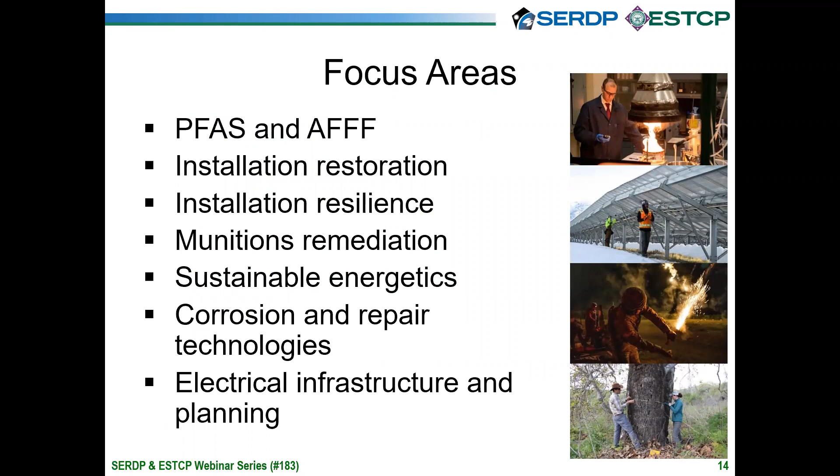We have several main focus areas for research and demonstration at SERDP and ESTCP, as are shown here on this slide.

As mentioned earlier, technology transfer is very important within the SERDP and ESTCP programs. Technology transfer efforts include the development of videos, training workshops, and guidance documents. The webinar series is a substantial component of our technology transfer efforts. Our webinar series highlights research and demonstration efforts from all of our program areas.

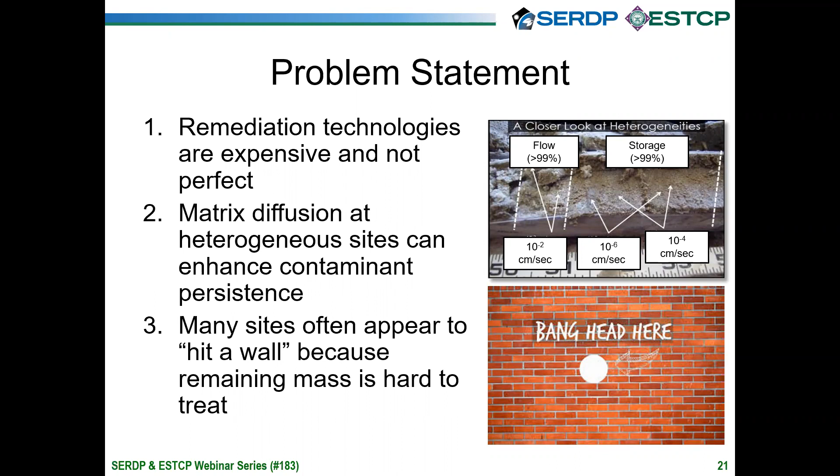So matrix diffusion is one of those processes, particularly at these heterogeneous sites, where that mass gets into these lower permeability zones, and it's just really difficult to target and can increase the amount of time in which that contaminant can stick around at a particular site. So what we're left with then is these sites where we've sort of hit a wall. Everything that we're doing is not necessarily leading to vast improvements. And it's because of the fact that that mass that's remaining is hard to treat in an efficient way. So this leads us to thinking about what to do next at a lot of these sites.

I've got one site I think that I've dealt with for 18 years since the first treatment, and we're sort of in this process now of deciding what to do next, what to transition to. And so in 2013, the NRC came out with this great document where they discussed this in context of these complex contaminated groundwater sites.

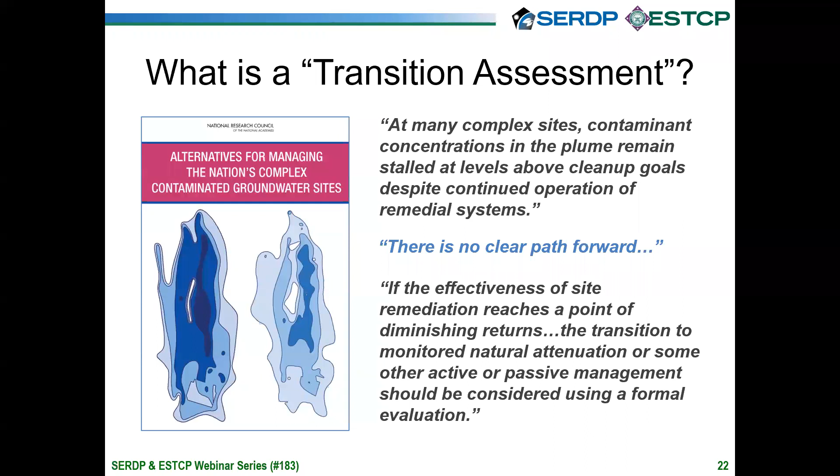And what they said was that at these sites, contaminant concentrations in the plume remain stalled at levels above cleanup goals despite continued operation of remedial systems. They said there's no clear path forward. And then they also point out that the effectiveness of site remediation, when you've got this point of diminishing returns, that's the perfect opportunity to transition to these other active or passive management approaches, things like monitored natural attenuation, and to do that in a more formal way.

So they proposed in this document these 3 key elements. Those are listed here. First is going through the conceptual site model and understanding the complexities at that site and what the implication of those complexities are for achieving cleanup goals. Secondly, do a very quantitative assessment of your concentration trends, be it at an extraction well or various monitoring wells across the site, to understand what's really going on in terms of the performance of what existing remediation systems might be doing, and then identify, if you want to transition, what appropriate approaches might be available for you, things like monitored natural attenuation.

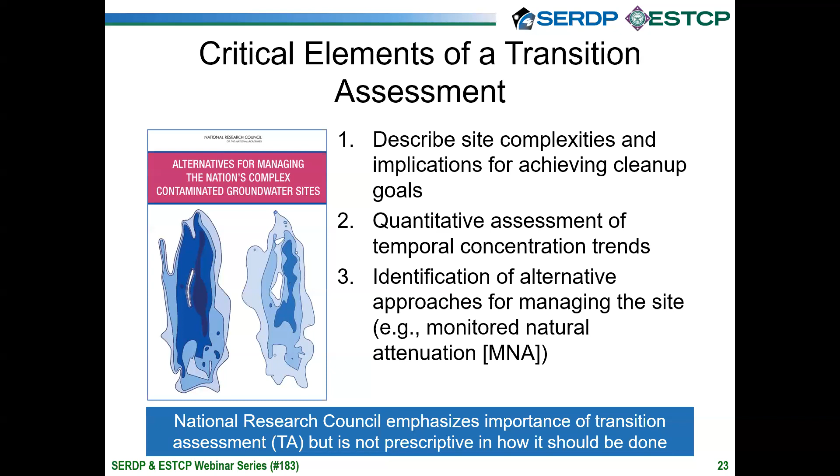So these are what they outlined, but they didn't put a prescriptive way to do this. They're just trying to say that these are the things that you need to do. It's up to you to evaluate these on a site-specific basis on how they might lead you to transition to a different approach. So our project simply was trying to take that a step further. We're trying to develop a quantitative approach. We're doing it through this web-based decision tool that's providing stakeholders with a way to really technically document how they're going to transition from any active treatment to something like MNA.

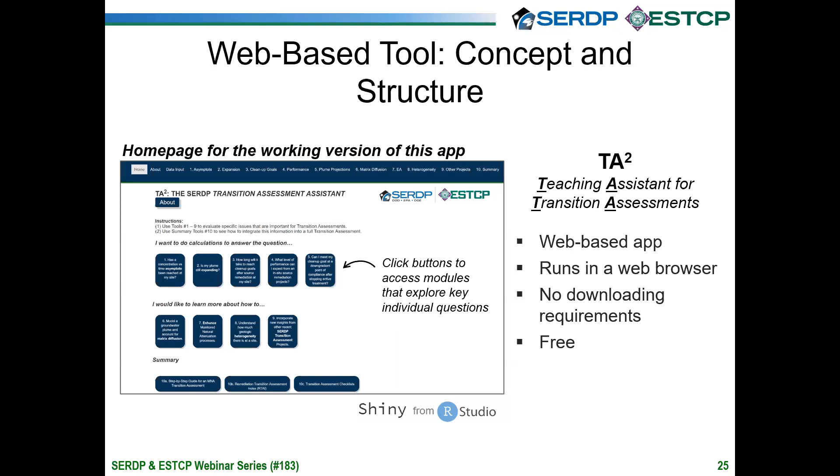Again, it's relatively simple. This is a web-based app, so it's going to run in anybody's web browser. You don't have to download this onto your machine. So that helps in terms of these compatibility issues that some people have with different types of software platforms that might have been used in the past. The platform that we're using for this is called R-Shiny. It's something that we've used before, and a lot of folks have used to support these decision tools. So it's good for data visualization, data analysis. And what we have in here, you can see, are these different buttons. These represent different modules within the tool that people can navigate through. So we'll show some of these here in a second.

What I really want to point out with this tool is that it's got these different modules. So some people can go through it and essentially say, hey, I want to answer a specific question, and they can just find the answer to that question by going through that particular module. If they want to do a comprehensive transition assessment, they can go stepwise through the entire process. So we're trying to make sure that there's different ways of using this type of information that might be appropriate for different users. We've got 10 different modules. I'll show those here in a second. They're divvied up into quantitative analysis tools as well as qualitative learning tools.

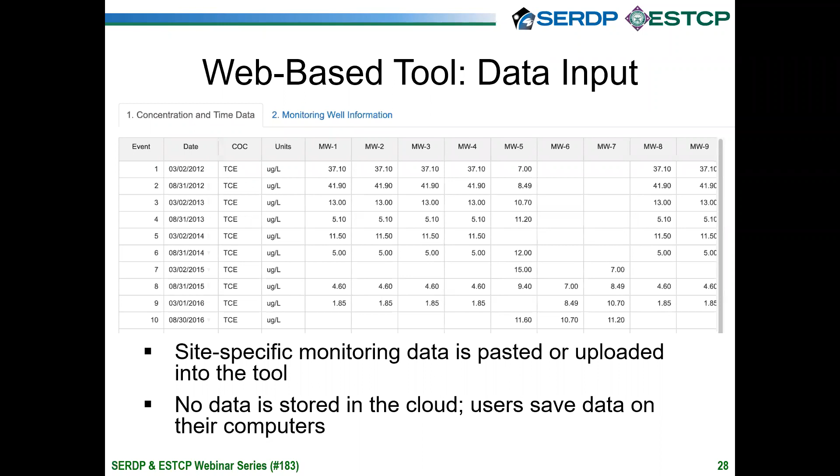It includes concentrations as well as coordinates for the monitoring locations. Once that's done a single time, you don't have to do it again. You also don't have to store any of this information in the cloud. It's stored locally on your machine. So the data input and customization of that data into a format this tool can use is a key first step.

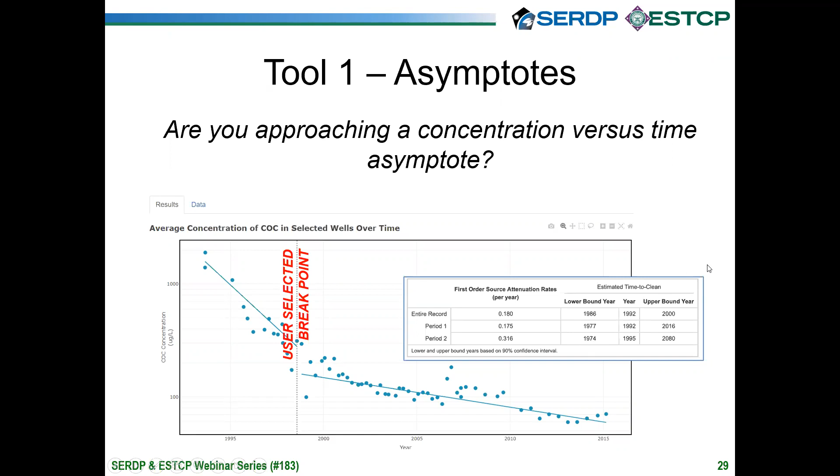It will display those rates for the different periods and put some bounding on this in terms of confidence intervals. It'll also project, if you've got a specified cleanup level, the time at which you'd anticipate that goal to be met based on current trends. So that's one of the ways it does that.

Then it goes through those data and does this checklist of whether it meets these asymptotic conditions. Are the two slopes different, meaning you've got a difference in the rates over time? Are things different than zero? Do you have a difference of more than two times in the first period versus the second period, and so on? You're lining up these conditions to see whether things satisfy different measures of an asymptote over time.

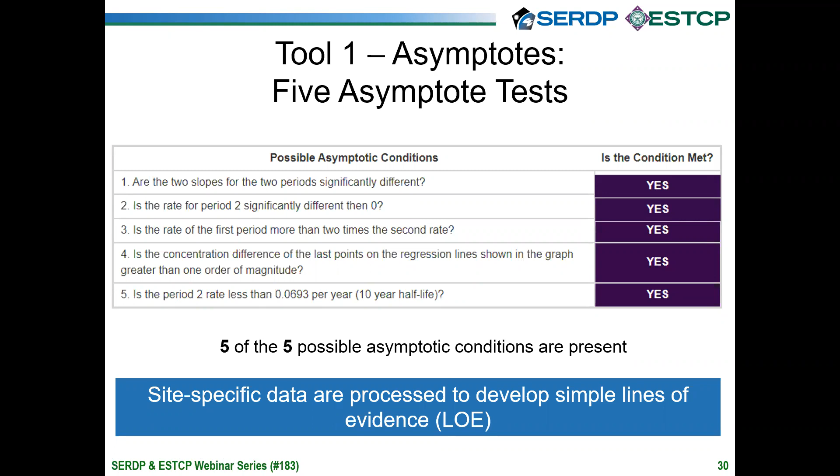So it's developing a line of evidence, and in this example, all 5 of those are met, so it's a good indication that yes, the performance at this particular set of wells has plateaued.

Another key element of a transition assessment then is to assess plume stability. So a stable plume is something that is obviously more conducive to then transition to MNA. So within Tool 2, it's going to do a spatial as well as a temporal analysis.

And so this is showing a plot of data from various monitoring wells that might be present in your plume. And then it's doing a Mann-Kendall, a non-parametric statistical trend analysis, to show you what the trend is in a set of wells, as well as individual wells, to get an understanding of the stability characteristics within that particular plume.

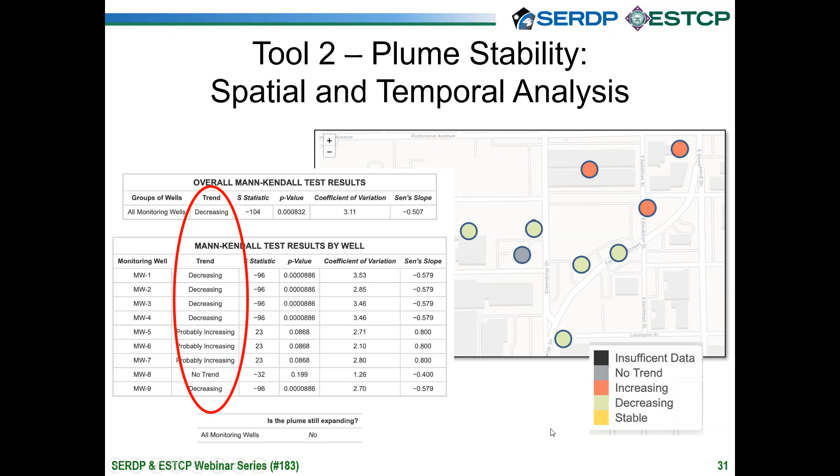This happens to be points that are overlaid essentially on where our office is located in Houston. So this is very much a hypothetical plume, although I will say that the data right underneath our building shows a decreasing trend. So this is information that you're going to want to be able to collect. You're going to want to be able to establish, particularly at the leading edge of a plume, that your plume is not expanding and may be ready to transition to monitored natural attenuation.

Next up is another critical element, and that's the remediation timeframe estimates. So Tool 1 can give you an estimate of the remediation timeframe at a particular well. But what this tool is really designed to do is to say, if I was to go in and remove the mass at the source, what would my expected remediation timeframe be after that action?

So a good way to do this is through setting up a model, and in particular the REMChlor-MD model, which is a nice model that was developed as part of an earlier ESTCP project by Dr. Ron Falta at Clemson University with help from GSI. And it incorporates the matrix diffusion processes, which can slow down or essentially lengthen the amount of time to get to a particular cleanup goal.

When we originally started this project, we thought, okay, we'll run lots and lots of simulations with this model, develop these different type sites and understand what the impact of various hydrogeologic and site-specific characteristics might be on that remediation timeframe. But it turns out that right before that, Dr. Bob Borden had a project where he did pretty much that exact same thing. They did 28,000 REMChlor-MD simulations and generated these remediation timeframes for a whole bunch of different initial conditions.

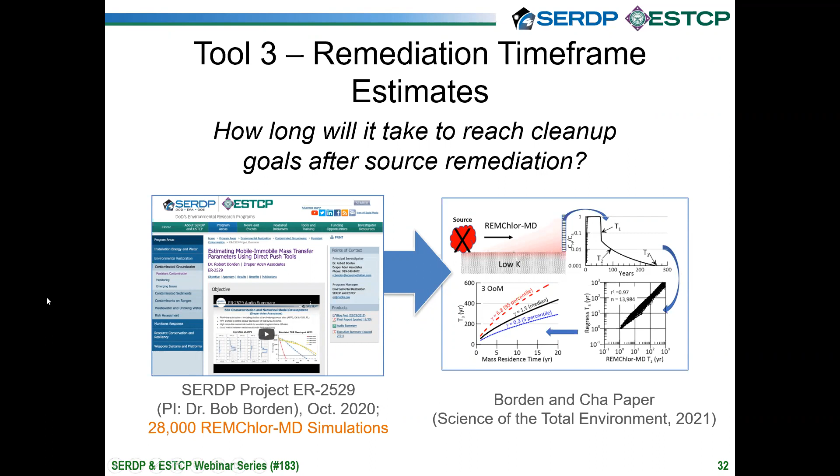So our job became a little bit easier, and Bob and his group published this paper in Science of the Total Environment that lays this out. Our job was to take that information and distill it down into an easy interface so that a user can enter their site-specific information and get these estimates along with some uncertainty analysis associated with those estimates.

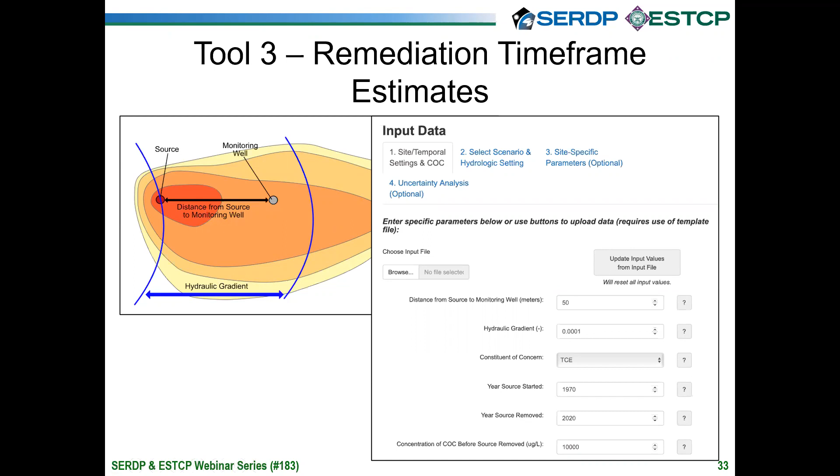So a user goes in and inputs their data: things like where their source location is, where monitoring well locations are, the year that the source started, the year that the source was removed, because again, what you're trying to do here is determine what happens after you remove that source, as well as concentration profiles. Then they're entering their hydrogeologic data.

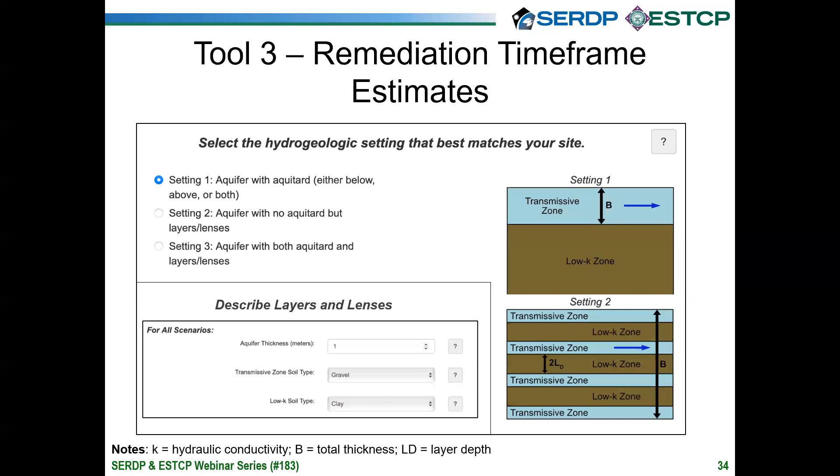So this is a setting where you can choose where you're placing relevant low K zones that might be adjacent to or within the transmissive zones that you're trying to clean up. And so you're putting in information related to what site characteristics might be closest to your particular site, so that information can be used to pull the model simulations that are most closely aligned with your particular site.

And then what the tool will do is plot that information over time. So this is a case where it's showing the concentration in a particular well that you're trying to monitor over time, and it's saying how long it's going to take after you remove that source to get to those particular cleanup levels. And in this case, it's one where matrix diffusion is very active. So if you're removing that source in 2020, which is here on the far left side, it's going to be a long time.

And so this is evidence, again, if you're using this as part of a transition assessment, you're saying, well, I'd like to transition to something more passive, because even if I try to remove all of that mass through one of these active remediation technologies, it's still going to take me a really, really long time to get there.

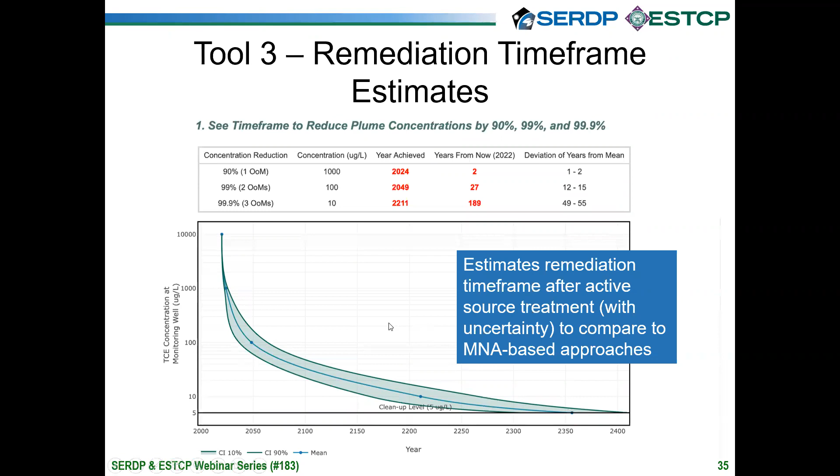All right, Tool 4 is another that focuses on remediation performance. And this is trying to answer the question: what level of performance can I expect from an in situ remediation technology? So not necessarily long-term, but right away, what concentration reductions might I actually expect?

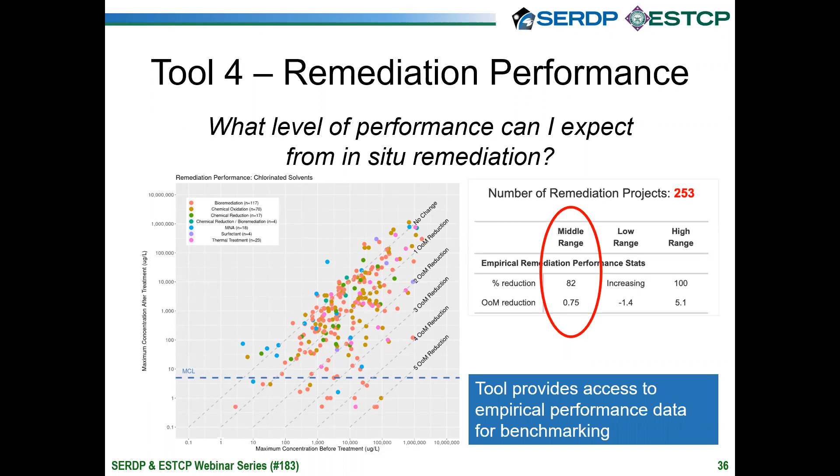Okay, we come to tool 5 then. This is sort of the last of the really quantitative ones, but it's an important one. And it's saying not necessarily what's going on in the source, but what's happening in the plume. And one of the key elements from monitored natural attenuation is to say, would attenuation in the plume be able to ensure me that I'm going to be able to get to a goal concentration at a down gradient point of compliance? So this is really looking more at concentration versus distance.

And in this case, you need to know what that rate is. You need to have some confidence that you can estimate that concentration change with those distances. And that can be done either getting a rate with field data, or it can get a rate constant from some sort of a lab-based assay. So this tool allows one or different options to be used.

And again, all it's trying to do is forecast what the plume extent is going to be down gradient of a particular source as you work towards that point of compliance over time, either naturally or after shutting off a pump and treat well, for example. And again, if that forecasted concentration at that point of compliance is below the goal, then this supports transitioning to something like MNA.

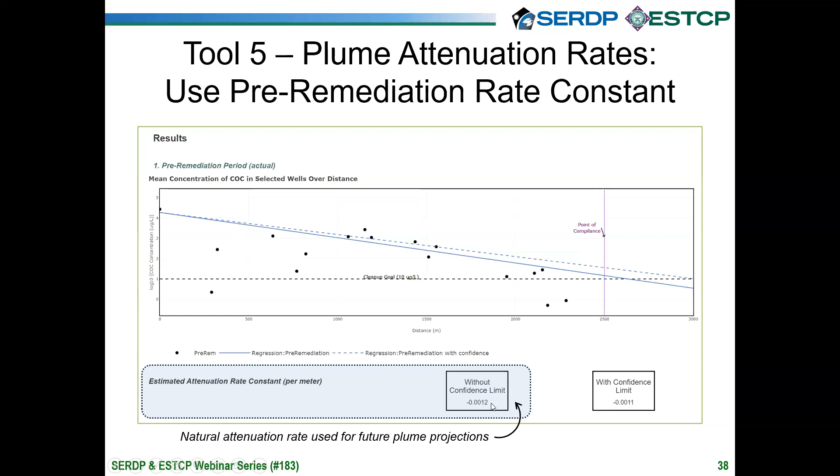So with these particular data, you see a general downward trend, and the regression plots the best fit line through there, the slope of which can then be translated into a rate coefficient. So that's what this tool is doing. It's giving you a rate coefficient, a natural attenuation rate that you can use for future plume projections. So the next step in the tool is that I've selected a rate coefficient. In this case, I used that pre-remediation data.

Now I'm going to move into my post-remediation period. I'm going to say, can I reach that concentration goal? That concentration goal is represented by this horizontal dotted line by the time I reach my point of compliance, so that's this vertical purple line. In this particular case, in this post-remediation period, maybe this is the concentration at a particular well, might be the concentration at a pumping well, maybe after a rebound test.

And you're saying that rate, is it enough to get me down by the time I get to that point of compliance? In this case, it is. It's giving you a concentration that's there, with some degree of confidence based on this 90 percent confidence level. So it gives you some assurance that natural attenuation would be enough at this particular site.

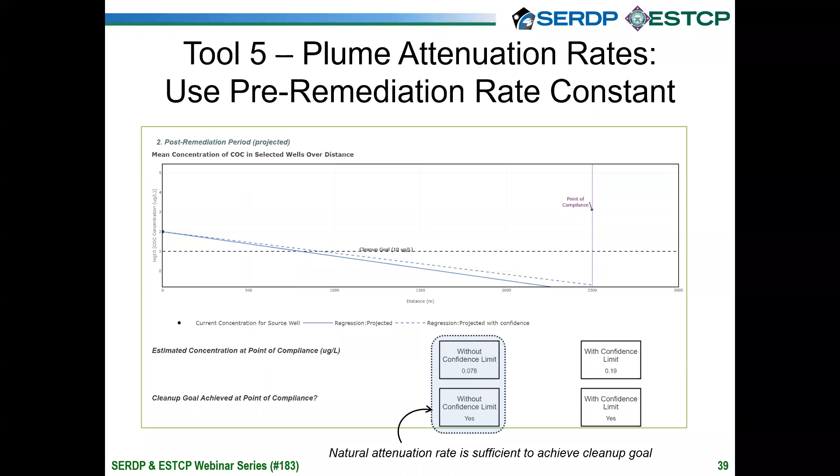Okay, so that's a flavor of some of the tools. The information from those various quantitative tools, we're trying to pull into this summary tool. And so what we're outlining on this particular slide is the decision process that one might go through specific to transitioning to something like MNA. So up top under number 1 are these bright line criteria for MNA. That's going through what I just showed, which is tool 5, essentially this idea: can I reach my concentration goal at a point of compliance with MNA?

And then secondly, do I have information on the remediation time frame that says that MNA is essentially going to be comparable to any other alternatives that might be available to me? So if something like tool 3, you go through and you say implementing that active technology isn't going to get me all that much of a shorter remediation time frame, then that's evidence that MNA might be a more efficient long-term management strategy at that particular site.

After that, we have this second step in there, and that's the Remediation Transition Assessment Index. And so this is something that we developed. It's a simple metric, as I said before. It's sort of this 1 to 5 metric. If you take your information from your previous tools, it'll assign a number to each one of those. It'll then use that to calculate this metric for your site.

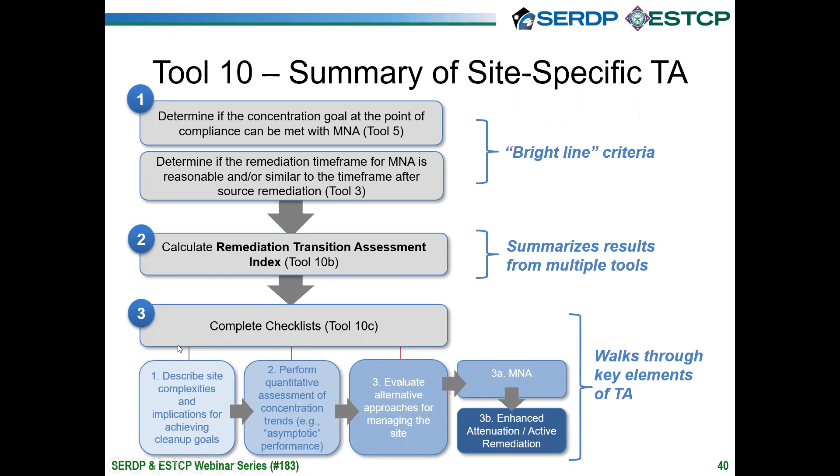So this is not something that necessarily everybody would need to do, particularly if they're only interested in 1 or 2 portions of a transition assessment. But it's there in case somebody wants to document this in a transparent manner and make sure that they've checked all of those boxes.

Okay, so again, we're trying to work on this idea that people need a technical basis for doing these transition assessments. It's very important to document these lines of evidence that MNA might be an appropriate long-term management strategy for a lot of these sites. So that's what this tool is designed to do. And the platform is also intended to be useful for a lot of different types of users. Those people who want to go through individual modules, do something relatively quick, they can access those. People that want more of a comprehensive approach to transition assessment, it's built for those people as well.

And the benefits to DoD are pretty simple, but we've got this tool. It's available for site managers, site contractors, those sorts of things as well. But again, it's designed to be free. It should be compatible with most people's devices, and it'll be supported through a lot of guidance and help information that's integrated into the tool itself.

We will be doing a series of case studies. Those are ongoing right now. So there are 4 or 5 different sites where we're applying the elements of this tool to real sites, and we'll report on those within the report for this project. We also have a training webinar where we'll actually do live demos of this particular tool, go through some of those case studies as well as part of further tech transfer for this particular project.

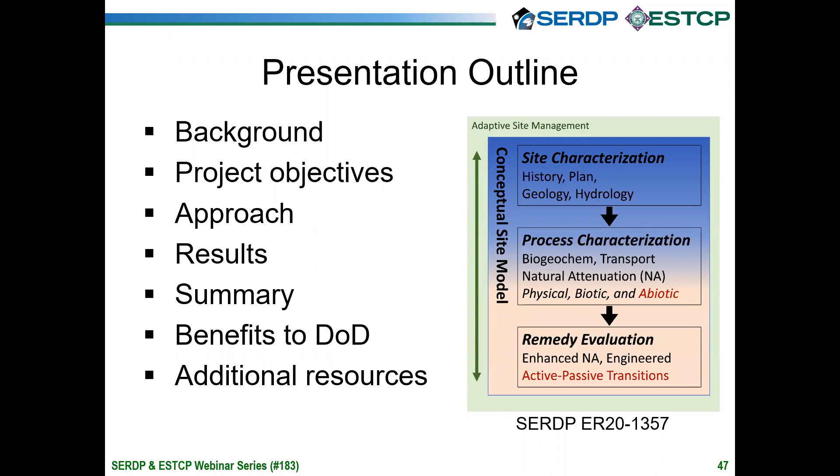We're going to focus pretty specifically on a subset of that, which is highlighted in the red text under process characterization. Our focus is really on this question of, is there a significant role for abiotic degradation in natural attenuation? And a corollary to that would be how might that be influenced by active to passive transitions in the management of a site. So the backstory behind this is illustrated in this next couple of slides. Around the time that we were writing the proposal, there were two papers that were in press.

One from Michelle Scherer's group, and that paper had this graphical abstract, which illustrates the main point of that, which was that when they tried to measure degradation of TCE in batch bottle experiments in the lab under highly controlled conditions using magnetite as the reductant, they were not able to get any measurable reactivity.

When they added iron 2 to that system to stimulate the reducing capacity perhaps of the magnetite, they still didn't get any significant TCE reduction until they exceeded the solubility product for ferrous iron hydroxide. And so at that point, you start to precipitate Fe(OH)2, which in this system is a white floc. And then you can see that visually in the experiment, and then you start to see evidence for reduction. And so this led to the conclusion that there was a phase forming in the system that was necessary and primarily responsible for the dechlorination that they observed.

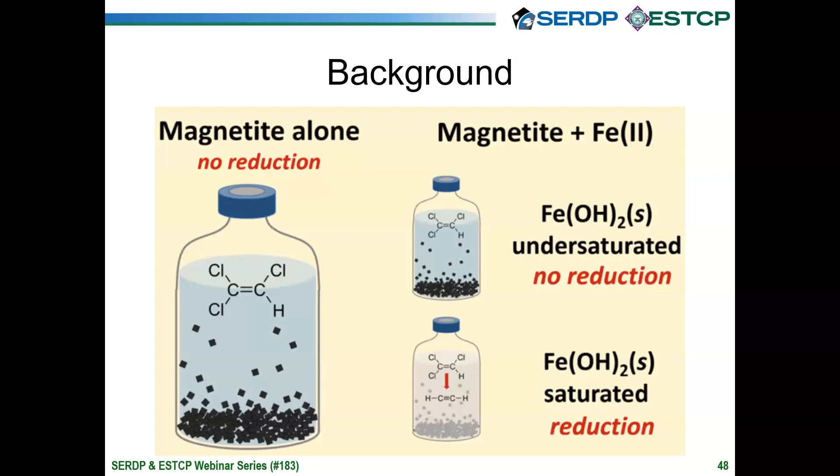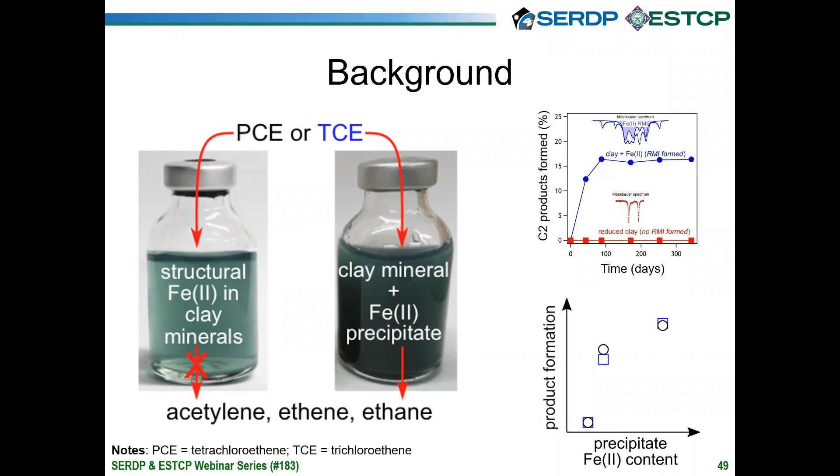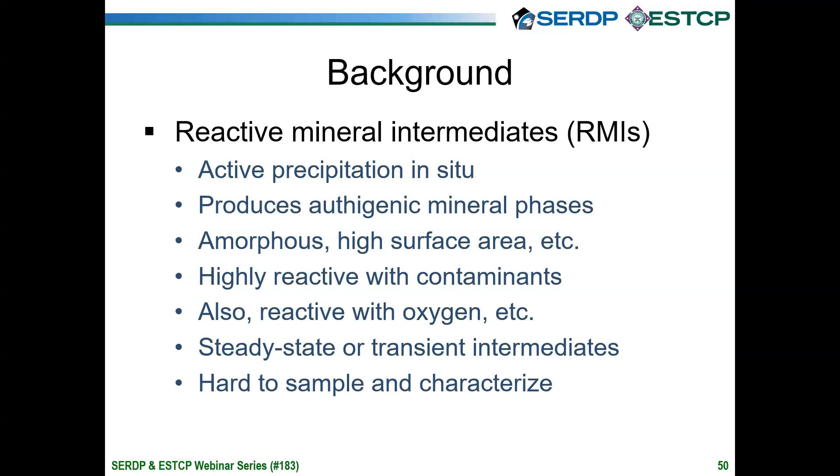And as a result, there's going to be a competition for these reactive mineral intermediate phases with everything that's available in the system to react with them. So that would include the contaminants and oxygen and anything else. And so that results in a condition where you have essentially a steady state concentration or a transient intermediate concentration of these RMI phases. And because they're dynamic and they're vulnerable in this way, they're hard to sample and to characterize. You can't pull a sample out of the ground and put it in a bag and send it off to a lab and expect the results you get back to be representative of what was going on in situ.

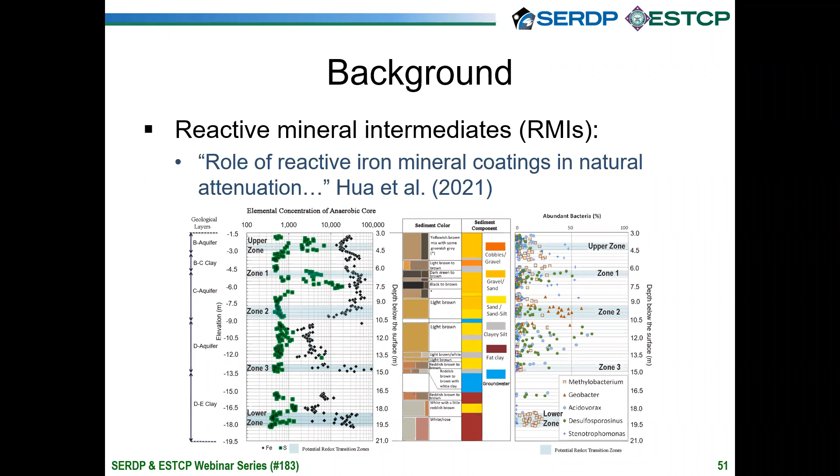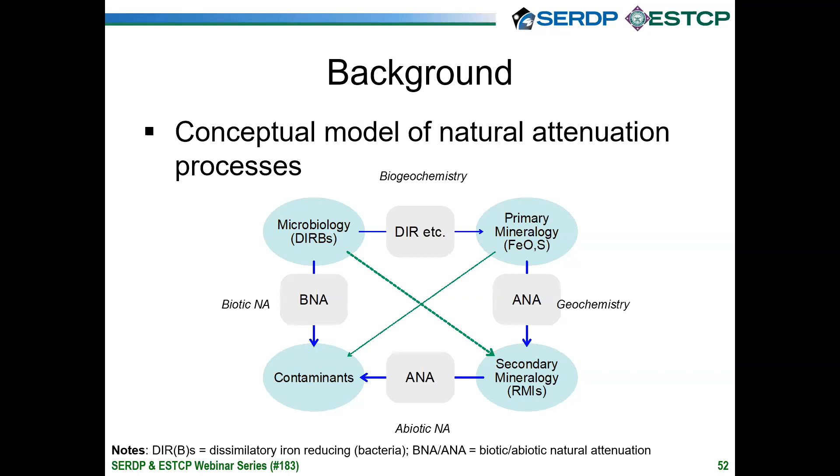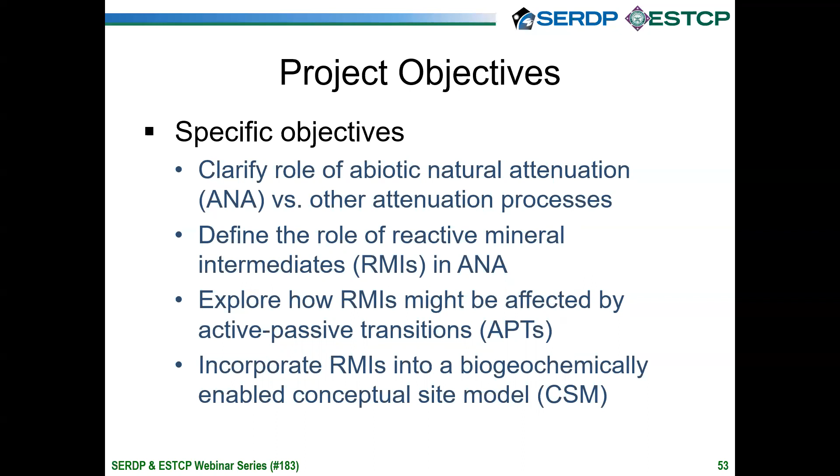So the project objectives were to clarify the role of abiotic natural attenuation versus other attenuation processes, specifically to define the role of the hypothesized reactive mineral intermediate phases in ANA, and then explore how all that might be related to active-passive transitions, which is today's main theme, and ultimately to try to incorporate that into a biogeochemically enabled conceptual site model. In theory, taking the results of this project and feeding them back into the kind of tools that Dave described in the previous presentation, so that his model could basically incorporate the insights that are derived from this study.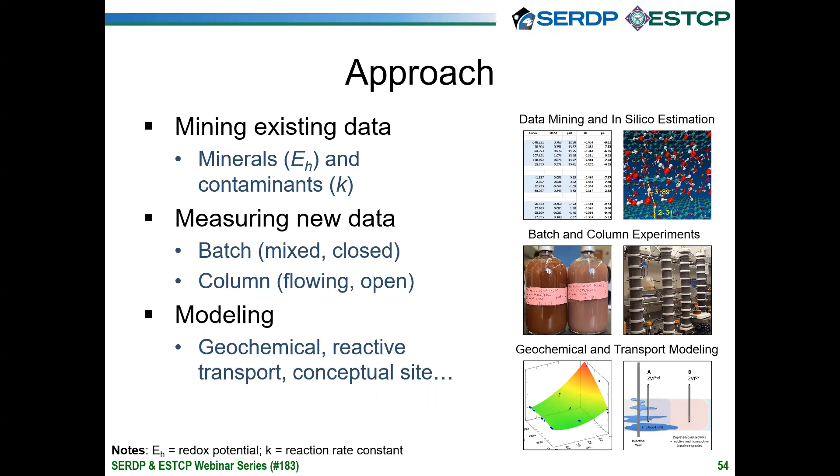So our approach had several elements. One of them was to mine existing data, both with respect to the environmental mineral phases and also the contaminant reactivity. Also to measure new data, because it was clear that there's lots of data gaps. And we did that both with batch experiments, which are well mixed and closed systems, and in column experiments, which are flowing systems that are, by comparison, open systems. And then to try to put that together into a geochemically enabled reactive transport model.

So with respect to results on the first part, we did an extensive exercise in mining the literature for the thermodynamics of mineral phases that might be playing a role as mineral abiotic reductants in these systems. And we compiled all that data in an Excel spreadsheet and wrote a bunch of formulas that gave it the capability to calculate free energies of essentially any arbitrary combination of iron containing mineral phases and dissolved species.

And then from there, you can calculate the redox potential, and you can use that as a way to try to assess what the driving force for reduction might be from any combination of hypothesized reaction that you might be considering to try to explain what evidence you might have for an ANA type component in chlorinated solvent degradation. So this tool is just focused on the mineralogy aspect.

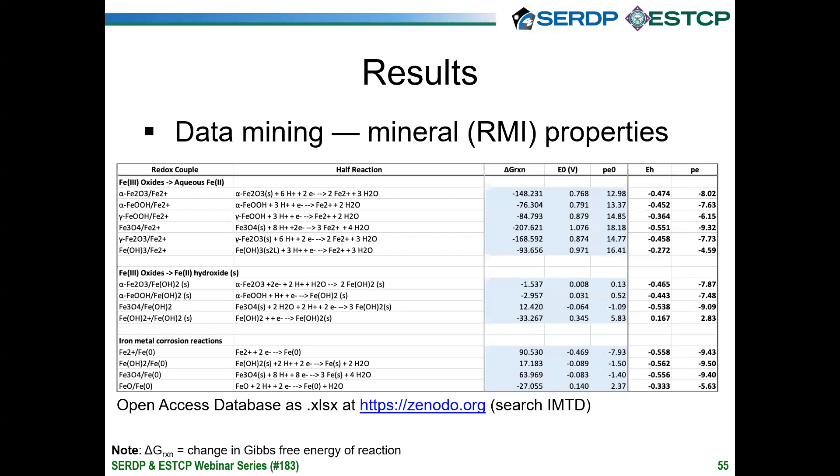It's currently openly available via the open access website called Zenodo. The link is there. You can easily search up that website. You can find it by either typing my name into that website or searching the acronym IMTD, which stands for Iron Mineral Thermodynamic Database. Again, it's an Excel spreadsheet, so it should be totally accessible to you. It's also fun to play with because it allows you to visualize a lot of things that you have been thinking about for a while in that context.

On the contaminant dechlorination side of things, so the contaminant property aspect, we did an extensive mining of the literature for reaction rate constants, and we compiled them in a database which is not yet openly available. That's on the to-do list for the near future. But we did publish a version of this in a review paper, which I'm happy to send to you. It occurred to me a few minutes ago that I didn't include that in the supporting information at the end of this slide deck. So you just have to email me if you want a direct copy of that.

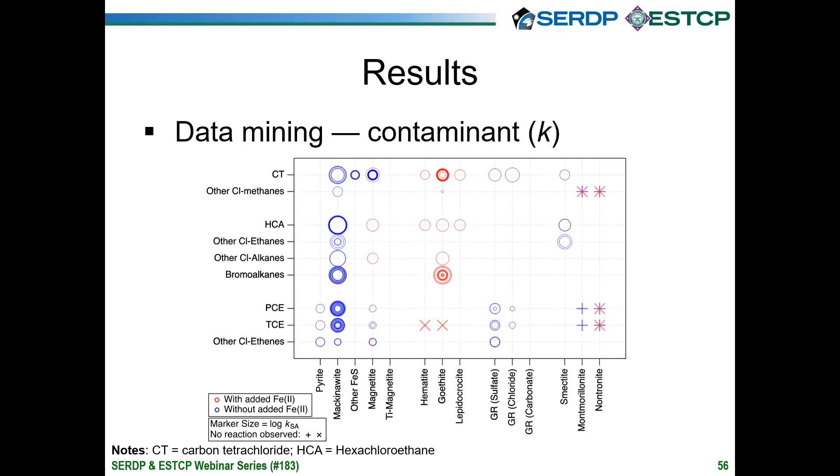And if you focus on the vertical on this, you can see that there's plenty of data for carbon tetrachloride, that's CT. But for other chlorinated methanes, there's next to nothing because they're much less reactive. Hexachloroethane, that's HCA, is pretty reactive, and there's plenty of data, but as soon as you start to go to the less halogenated compounds, the amount of data drops off. PCE and TCE, there's plenty of data, but also lots of data gaps because of its relatively lower reactivity.

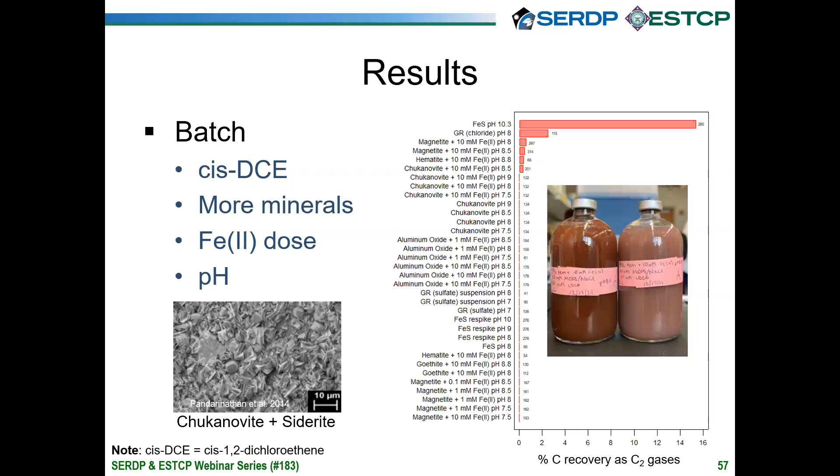And note that on the photo that's in the figure, the bottle on the left is just the color of the pure iron oxide, and the bottle on the right is the color once you start to precipitate that Fe(OH)2-like phase that I mentioned in the second and third slides of the presentation.

The columns are packed with sand, with or without magnetite, and some of them are dosed with iron 2, most of them are dosed with lactate, some of them also get sulfate, et cetera. We measure lots of things, both on the effluent and in the ports along the column length, everything from pH, Eh, iron 2, dissolved iron 2, and the VOC concentrations.

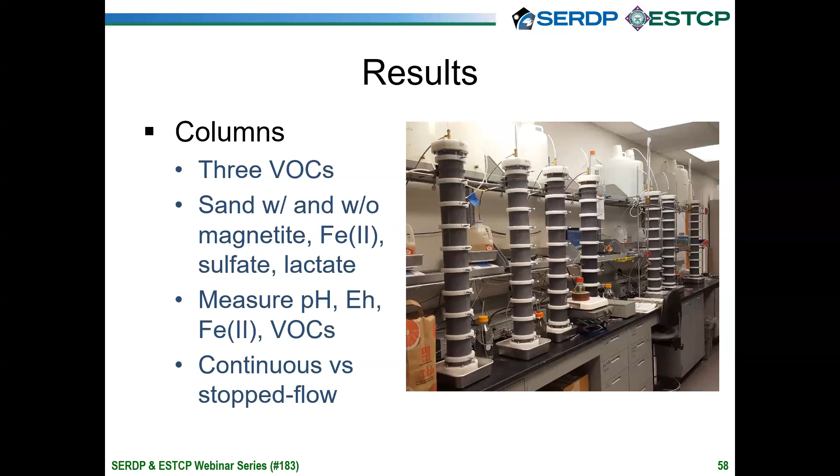And as you'll see in a minute, we've done something a little bit novel here, where we've operated the columns not just in continuous flow mode, but also in stop flow mode. So the idea of the stop flow mode thing was basically that it might help us get at this active passive transition thing. And so the hypothesis would be that under steady flow, you generate a stable gradient, which is similar to what you might get under natural conditions or steady pumping in a field site.

Under stop flow conditions, you simulate something that might be akin to a variable natural gradient situation, or transition from active to passive remediation. And so we tried to use this as both an experimental and also a thought experiment to try to think about what an APT, active passive transition, would do to all the in situ geochemistry that might be driving ANA.

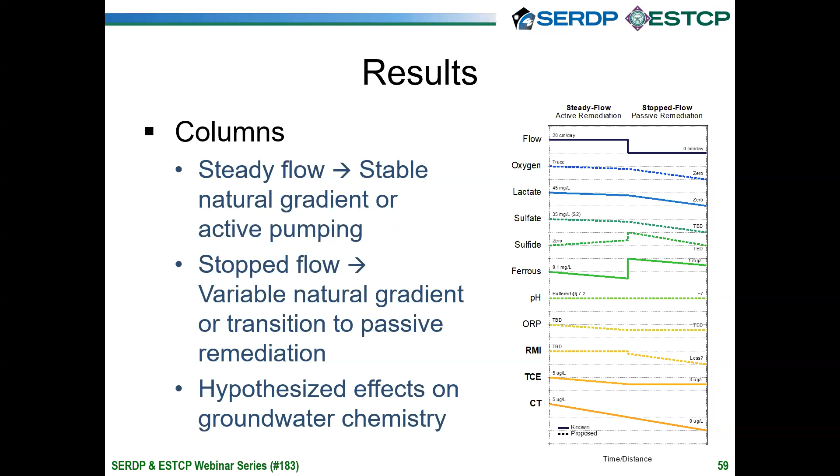Probably the most interesting one is the third from the bottom, which is the RMI, the reactive mineral intermediate phase. Remember, I said that that's kind of a steady state transient thing that's impractical to measure. So we don't really have any direct way of knowing what that number would be, or what that population of RMI phase might be. But we hypothesized that under steady flow conditions, it would be steady. And then under stop flow conditions, it would change, and it might change suddenly. That's the little drop there, and then more gradually later on.

So to see what kind of experimental evidence we have for all that, here is some data from the column that contained no magnetite. So it's packed sand, no magnetite, but it was fed iron 2 during the course of the experiment. And this is dissolved iron 2 measured in the pore waters taken from the ports along the column. That's the colored markers and lines, where the darker color is the beginning of the column, and the lighter, hotter color is towards the end of the column.

And then the x-axis here is actual calendar clock time for operation of the column. And so you can see in the left side of the figure that iron 2 steadily decreases over operating time at all ports. Well, I'll leave the interpretation to the next slide. Sorry, I didn't say that the stop flow events are the gray shaded zones in the middle of the figure at 200 days and towards the right of the figure just past 400 days. So during the stop flow event, you see a rebound in iron 2.

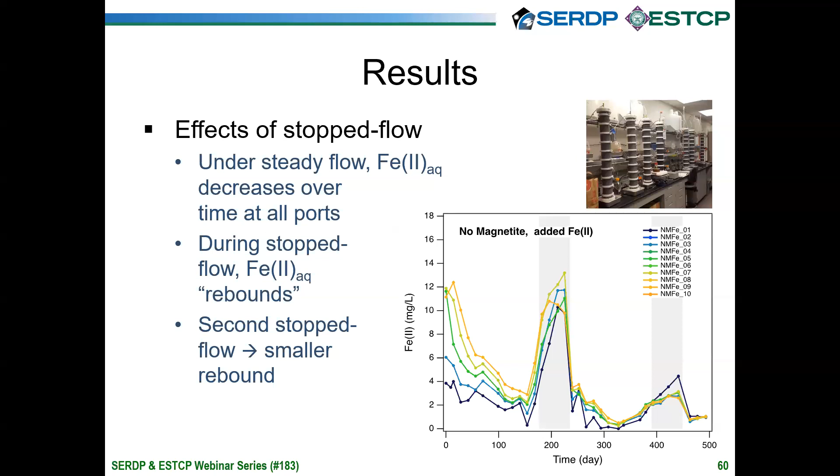That we didn't see coming, and that's certainly an interesting result. And the question is, what does it mean? The other thing to note, which we don't really have an explanation for, is that the size of the rebound got smaller with the second iteration, and that's something that we probably should repeat before we spend too much time trying to interpret it. But the interpretation that we give the main characteristics of this figure are as follows.

Steady flow conditions favor formation and a stable population of the RMI phase. And that results in less iron 2 measurable in solution because it's tied up in the RMI phase. And that RMI phase favors abiotic degradation of the chlorinated solvents. And as you'll see in the next slide, that produces degradation of the chlorinated solvents.

Under the stop flow conditions, it destabilizes the RMI phase, and you end up essentially releasing iron 2 into the solution, and perhaps that would be less favorable for ANA. And possibly this kind of treatment could be extended or inverted to use as a diagnostic for the role of reactive mineral intermediates.

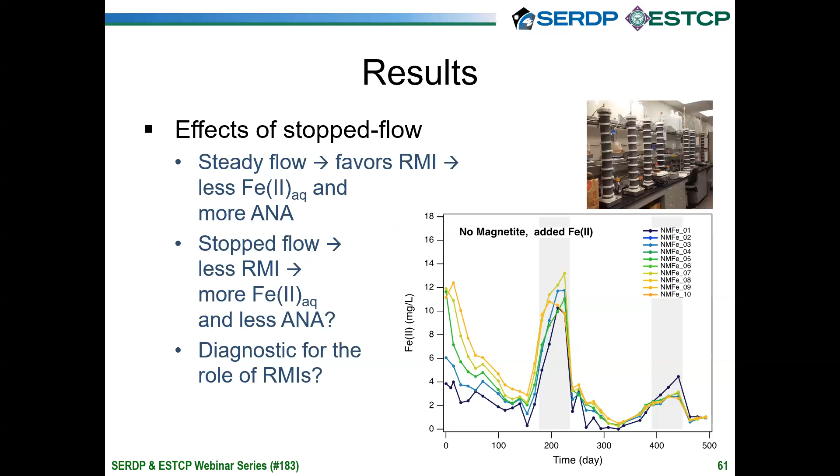So the data that we have on actual dechlorination are limited, but this is a representative set of them. They're a little complicated to interpret, so I'll try to not get lost in the details. But on the left, we have data taken during steady flow, where the x-axis is time taken along ports along the length of the column. And so that's essentially contact time.

On the right figure, it's under stop flow conditions. So now we don't really expect the ports along the column to show us anything different. So we're just going to use port 1 for this. We have data for the other ports. But what now goes on the x-axis is clock time.

And so what you see is concentration of both carbon tet and TCE on the y-axis. TCE is the blue squares, and then chloroform, carbon disulfide, and CO are a subset of the products that we measured. And the key thing you see on the left is that both TCE and carbon tet go away under these conditions. Neither of those are simple first-order kinetics.

They're fit with a dual bimodal kinetic model, so that we've got two half-lives at the beginning, 5 hours and 14 hours, and at the end, 21 weeks and 23 hours. Over on the other side, in stop flow condition, they both look like they're producing essentially just first-order kinetics, and so we'll fit them to just one rate constant, and that translates to a half-life of about 20 weeks on TCE, and 15 hours or so for carbon tet.

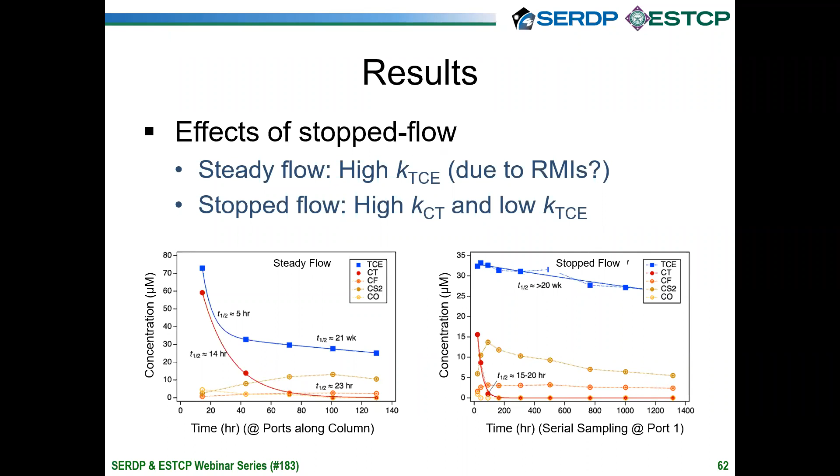And under the stop flow conditions, the carbon tet actually ends up being more reactive by a lot, and that's presumably because the RMI that's necessary for ANA of TCE is being depleted, and so that process slows way down, whereas the carbon tet process is not as much affected because it doesn't require as strongly reducing a phase. So that's a lot of details that we still need to write up and summarize so that they can be digested more fully by you all and everyone else. So with that, I'll just summarize.

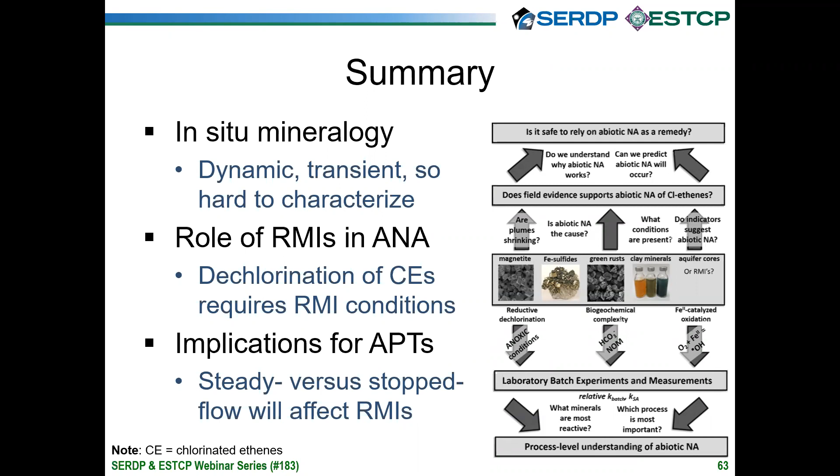The first part of this was about the in situ mineralogy aspect, particularly the idea that the RMI phase is dynamic and transient, and so intrinsically not something you can characterize using traditional methods. But it appears that you need that kind of reactive phase, RMI or whatever else you want to call it, to get significant abiotic natural attenuation of chlorinated ethenes. And then the implications for APTs are still a little bit to be determined, but it's pretty clear from these results that an active to passive transition is going to have a pretty significant effect on whatever ANA processes might be occurring in your system.

I'll note that the benefits to DoD are several-fold here. Partly they are focused on the management of groundwater sites with chlorinated solvent contamination. In particular, we would hope that these results would help you be able to explain apparent ANA. So when you have evidence that should suggest that, this gives you tools, ideas and information to try to interpret that and to justify remedies based on ANA if it all holds together. And further, ultimately, even optimize the application of ANA in any particular scenario.

It should also help a bit in explaining the effects of APTs, and that's all focused on chlorinated ethenes. That's the scope of this project. However, we would point out that all of what I said here could apply to other types of contaminants. So that would include nitro reduction of explosives, TNT, RDX, et cetera. There may even be relevance of this to the oxidative processes that people have recently become quite interested in, sort of Fenton-like oxidation processes that occur in situ, catalyzed by iron minerals.

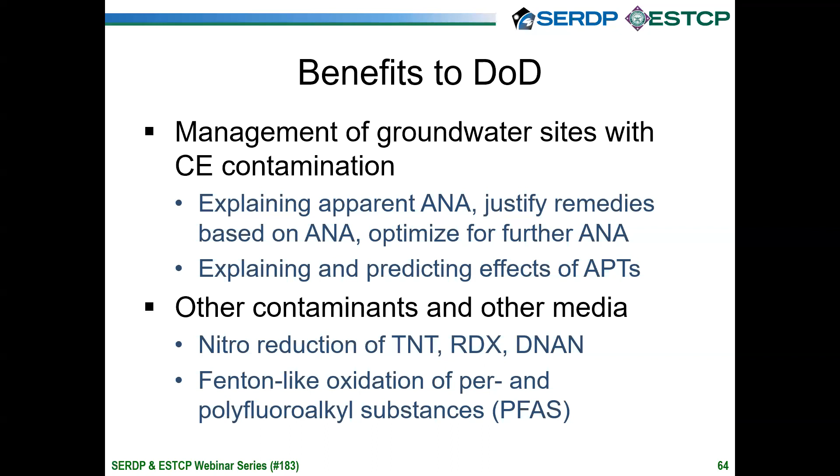It's quite likely that that iron mineral catalysis is favored by the RMI phase. We haven't really proven that yet, but it's quite likely there's relevance to that, and that in turn has some relevance to the fate of PFAS. So this could have several lives to come after the end of this particular project.

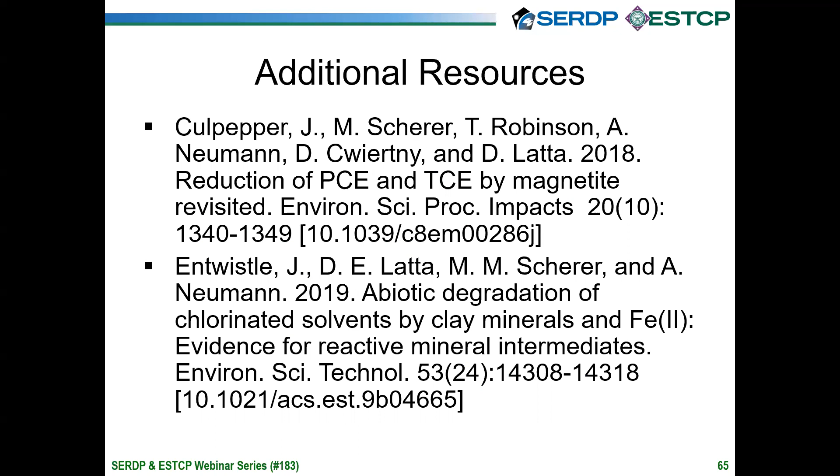The two published papers that I mentioned at the very beginning are Culpepper et al. and Entwistle et al. is the second one. The first one's in ESPI, the second one's in ES&T. The references are here. I can send you those if you can't get them some other way. Just feel free to email me with that.